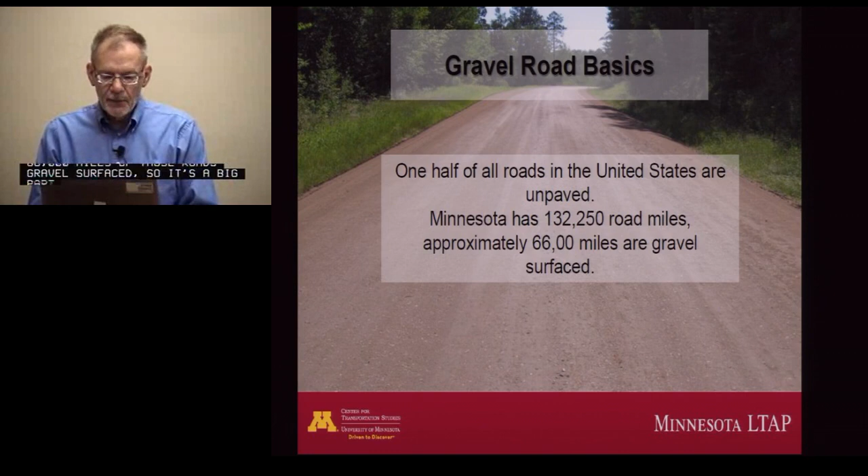What I'm going to talk about is a little brief introduction on gravel roads, and then get into developing a road maintenance plan. When we talk about gravel roads, about half of all the roads in the U.S. are unpaved. And a lot of those unpaved roads are a gravel surface. Minnesota has about 132,000 miles of roadway in the state, and that would make approximately 66,000 miles of those roads gravel surface. So it's a big part of the system in the state of Minnesota. When we talk about the importance of gravel roads, there's four bullet points of things that come to my mind.

As all of you are probably aware, the majority of our trips and loads in our state begin and end on a local road, and a lot of those are on a local gravel road. They're important accesses for emergency services to the citizens and businesses, and they provide delivery of day-to-day services and products to those residents and businesses.

And the fourth bullet, we talk about gravel roads, and something many of us that have been involved in gravel roads realize is that they were never constructed to carry the traffic that they carry today and the loads that they carry today. And that's an important thing to always remember about a local gravel road, that many of them were never designed to carry the modern day traffic.

And it causes, I think, all of us that are presenting today to think about all of you that either operate motor graders, are in charge of the maintenance, or elected officials responsible for gravel roads, that our hats are off to you for the job that you do. Just a photo of a gravel surface road that requires some work in the form of some drainage work.

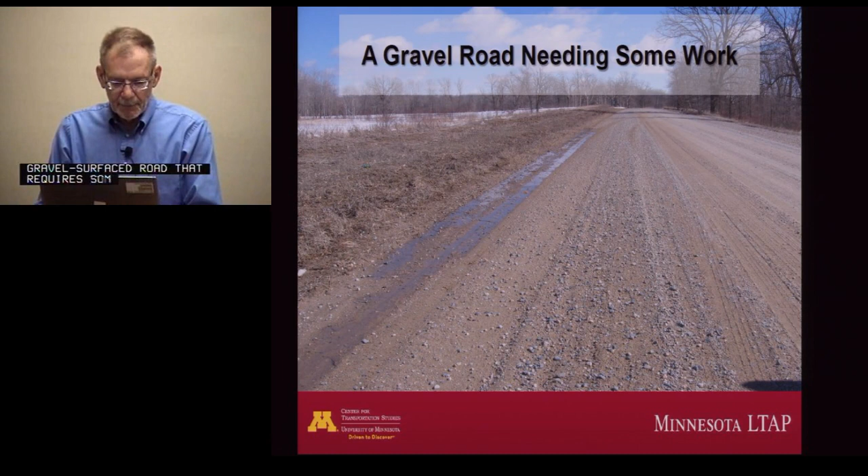When we talk about the factors of a quality gravel road, there are four points that I'd like to briefly go over. The first one being a trained motor grader operator with good equipment. And by trained, it's someone that has had the opportunity to work under someone that is a good operator, or that has gone to some motor grader training, so they have a good understanding of what the piece of equipment is capable of doing, how to operate it safely.

The other key component is quality gravel. You can have the best operators, best equipment, and the best road cross-section, and if you're not buying quality gravel and placing it correctly, you aren't going to have a quality road for the public to use.

Proper roadway cross-section, and underneath that a bullet that you'll hear mentioned throughout the next hour during this webinar is drainage, drainage, drainage, and those three terms are one of the key factors in maintaining a good gravel road. The portion that I'm going to talk about this afternoon deals with a maintenance or improvement plan and funding associated with that.

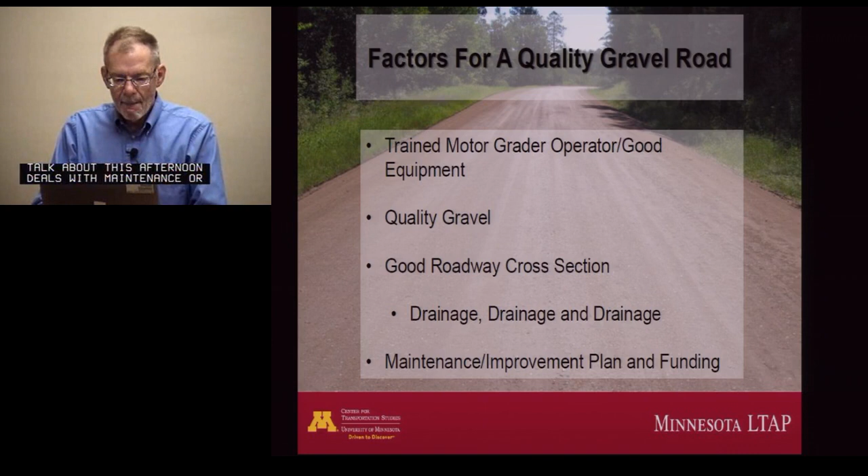Today, when we're looking at a good gravel road, which the photo on your screen shows you, with good crown, good surfacing, good drainage off the road and away from the road, in order to accomplish that quality system, it's necessary that you all think about developing a gravel road or road maintenance program. And I'm just going to go through this briefly this afternoon as steps along the way to develop that plan.

I think many of you have probably been in a situation where you're, for example, at a town board meeting where the public is not happy with the service they're receiving from their road system. It may be not enough gravel, it may be poor drainage, whatever the situation is. And you're in a situation where your level of service is here because your funding is here, and that's really all that you can accomplish with the resources that you have available.

If you want to move that level of service up to provide a more satisfied public, it will more than likely take some more funding. And in developing a maintenance program or plan, there are some basic steps to consider. One is to develop some basic standards, road dimensions. What do you think your standard road top width ought to be? What's your level of service, frequency of blading, re-gravel schedule, etc.

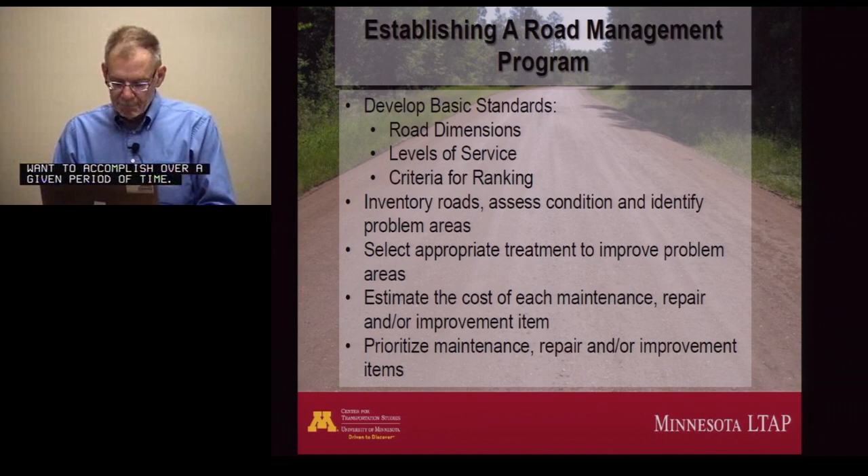And when we talk about improvement plans, we would recommend looking at a 3 to 5 year type program. When you're preparing your plan, one important thing to look at, I think, is what work you would accomplish in that plan given your current level of funding, and if your funding moved up, for example, 20%, what items on your plan list could you accomplish with that increase in funding?

And that, to me, is key when you're talking to your citizens. If they're not satisfied with the level of service that you're at today, you can show them a plan that, with an increase in funding, whatever may be reasonable for your entity, you can move your level of service from here to here, and the associated funding goes to here. I've seen a number of townships do this in my county and have been successful with it.

And it gives you, I think, a position, whether you're a maintenance supervisor or maybe the maintenance worker for a township, supervisor for a county, whatever entity you work for that's dealing with gravel roads. It always gives you the position of: if we want to leave our level of service here, and the citizens don't want to provide us any additional funding, this is as good as it's going to get. This is where we're at. So from that perspective, it gives you a plan to work from and a plan to explain to your constituents why we can do this or why we can't do that.

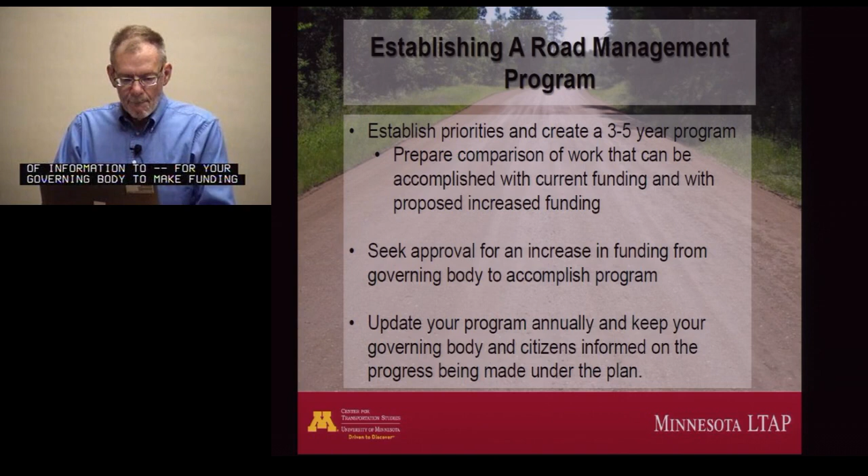First off, in educating the public of what it takes to maintain a gravel road system, and secondly, it provides a basis of information for your governing body to make funding decisions. And I'm going to close my portion of this with a gravel road rule, and John and Corey are very familiar with this rule: more good gravel is no cure for a poor road subgrade or poor drainage.

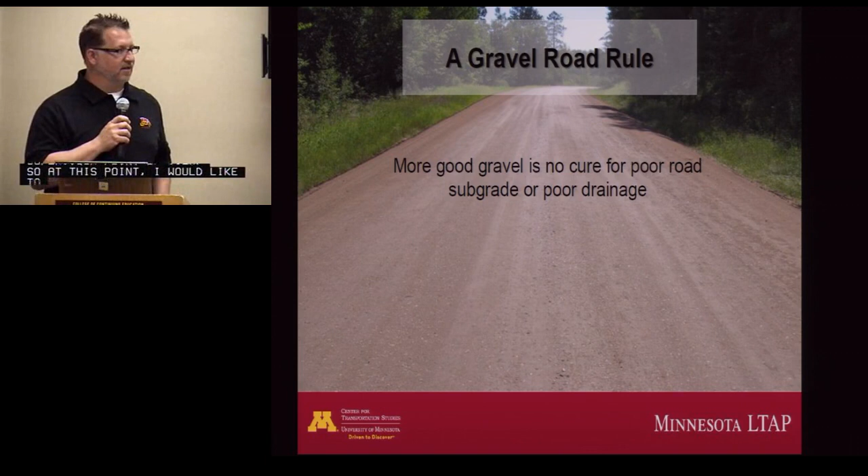Okay. Thanks, Jim. Good afternoon, everyone. My part of the presentation is dealing with drainage more than anything, probably from a supervisor's perspective a little bit, but just the importance of overall drainage in the road systems.

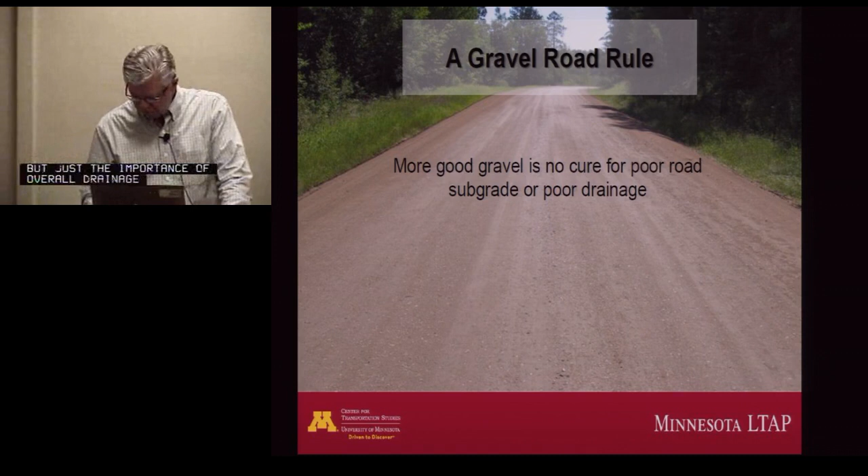You'll hear this, and I think Rick mentioned it a little bit. The three most important factors in maintaining a good gravel road are drainage, drainage, and drainage. The first part of the drainage equation is your crown, your road surface: maintain that at a 4% minimum and get that water off your driving surface. The next part is maintaining some type of ditch system.

Some of these slides will show not much of a ditch, mainly just a V-type ditch, but it is adequate to take that water off your road surface and move it along your road. And then the last part is get the water away from your road, through culverts, away from the road, in different ditch systems and so forth.

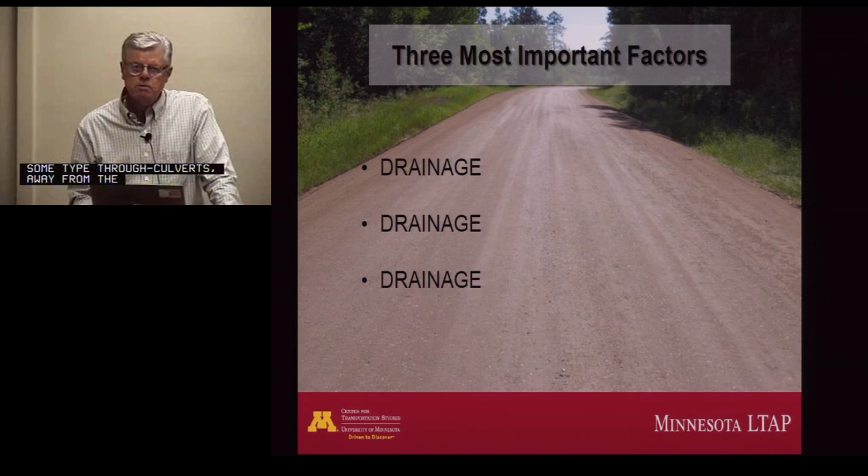Some of the issues we encounter driving around as supervisor: we see high shoulders starting. The best way to eliminate high shoulders is not to let them get started at all. You can see in the slides that there's a high shoulder starting here. It's good material, but eventually that shoulder will keep getting wider and building up, trapping the moisture and water on the road. It will not allow it to get off into the ditch system.

There's several ways of taking care of these issues once they get more complex and higher and wider. And through the years' experience, I've used a lot of different equipment. I think a shoulder disc works very well on them, where you disc it in a little ways, let it dry for a day or a few days, then come in and mix it into your surface.

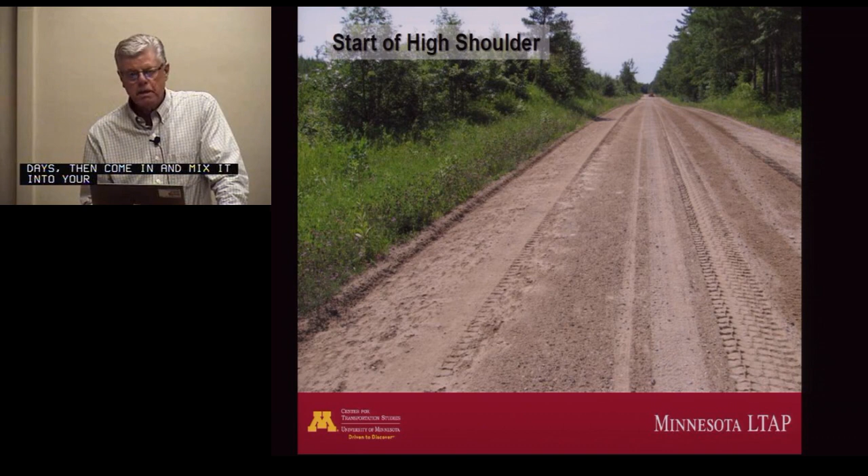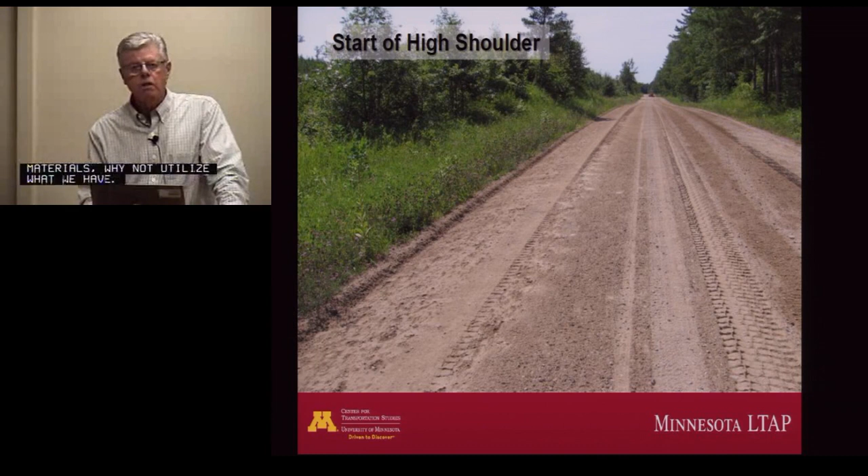Always that material out there has fair binder in it and a lot of good material. So utilize that, especially with the cost today of all our materials. Why not utilize what we have? And then if you have to re-gravel a little over the top, it makes a pretty good graveling surface.

As we mentioned, road drainage, a very important factor. This slide kind of shows the start of a poor crown, wide, really wide road that's really gotten flat and out of shape. Doesn't allow the water to get off into the ditch system.

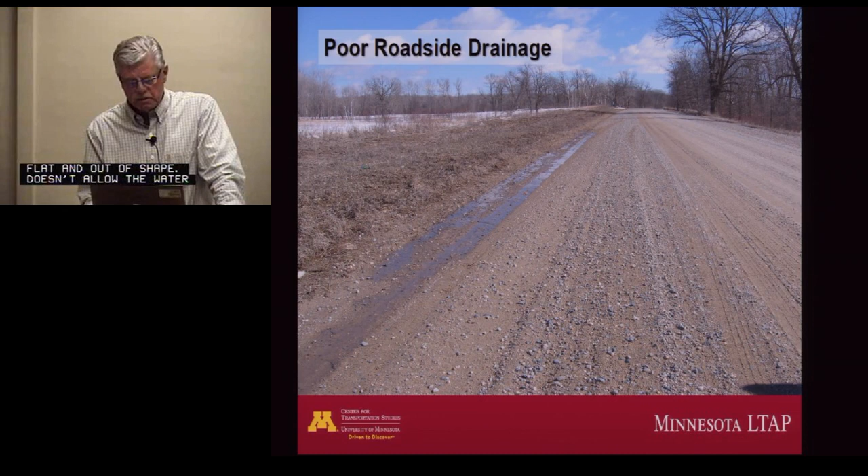Shoulder issues with ditch problem. This is kind of a complex problem. You got high shoulder, and then there isn't any type of ditch, once that water runs off the road, to get it away from the road and down into a ditch system.

Once this gets this far along, it's more than just a little reshaping issue. We probably got to do a lot of re-gravel, reshaping, get that road back into the typical cross-section that we want it to be at, clean the ditches, and get our ditch system and drainage, complete drainage system, back in working order.

Just looking at a good shaped road. It takes some time to get your road that's out of shape back into this type of shape again. In this slide, it shows a road that has the outer 4 feet at a steeper slope than a normal crown. That gives you additional shoulder width. And at one time, this road was probably bladed with a 16-foot motor grader. It took us 4 passes to complete that grading on this.

Since we reshaped it, got it back in a good typical section, 4% crown, now we're able to blade that just down and back. I think we all have to look at ways we can cut our costs out there, and with a little additional work at some time, we're able to do that. Just our routine maintenance costs on this road were almost cut in half.

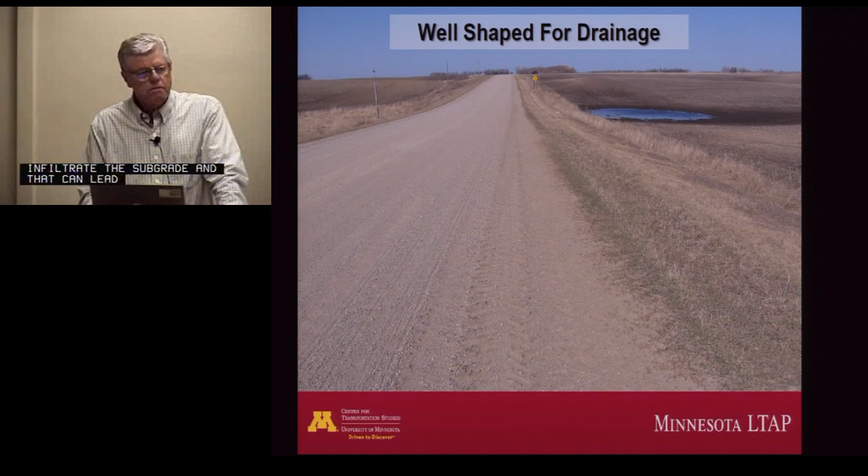Again, on ditching, here in the wooded area, some of our roads back in Becker County, which I was superintendent of for quite a few years, a lot of them are up in the forest area. We had to establish some type of ditch system, and good V ditches work very well. Once you get that established, and we did most of this work with just motor grader and a shoulder disc, you can accomplish a lot of good work with just two pieces of equipment.

Once we got it shaped, got our V ditches back in so they were operational, then we came back and re-gravelled. Prior to doing this, the road surface did need some re-gravel done to it, so we weren't just going out and spending extra money, but it was a needed maintenance operation that had to happen.

Again, on the road drainage, I can't stress enough, proper crown at 4% or probably a little bit more. Once you get under that, if you're down around that 2%, that's typically what a bituminous road crown is. You don't have enough drainage there to take your water off the road adequately.

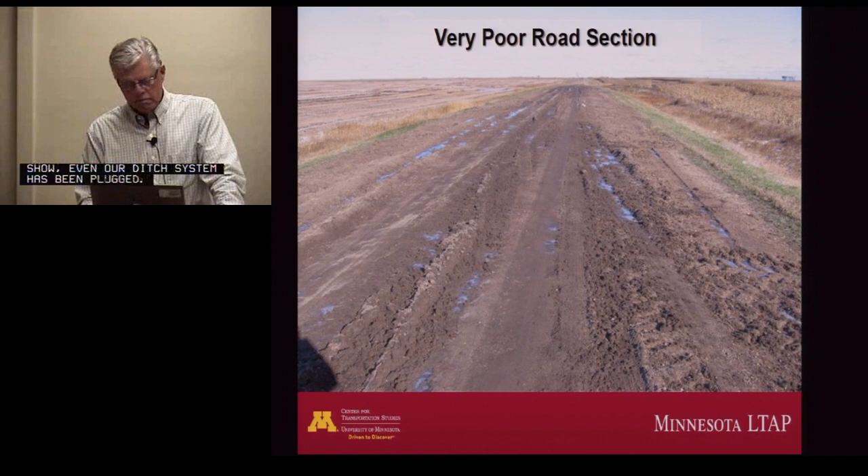Again, no crown, lack of good surface gravel, and also you can see the stuff that's been pushed over and into the ditch system. This will not allow proper drainage in our ditches.

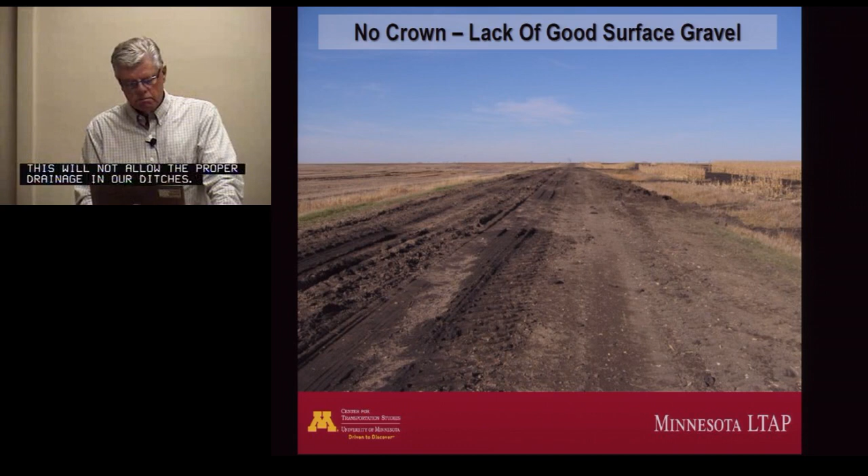Also with the drainage, we have to maintain our culvert system. What I like to do is in the late summer, fall, have your grader operators make a list. Keep track of where there needs to be some work done before it freezes up in the fall. This type of situation happened where a culvert was actually filled with material. It froze, and then you start getting calls from the farmer in the spring of the year. He's waiting to get in the field, and we're flooding his fields.

Big issue. And it costs a lot less to go out and maintain these areas late in the fall before freeze up. And I always relied very heavily on our motor grader operators to feed me that information. They're the eyes and ears out there every day going up and down these roads. As supervisors, we don't have time to cover all the miles of road once or twice a week.

So, kind of concluding here, again, drainage is one of the key factors in maintaining your gravel road system. Keeping that water off your road surface with adequate, like 4% crown, keeping those ditches and culverts clean. And once you get that water flowing in your ditches, try to get it away from your road surface. If we can maintain the integrity of our road surface, it will sure help the structure of that road, especially with the increased heavy traffic we're dealing with today.

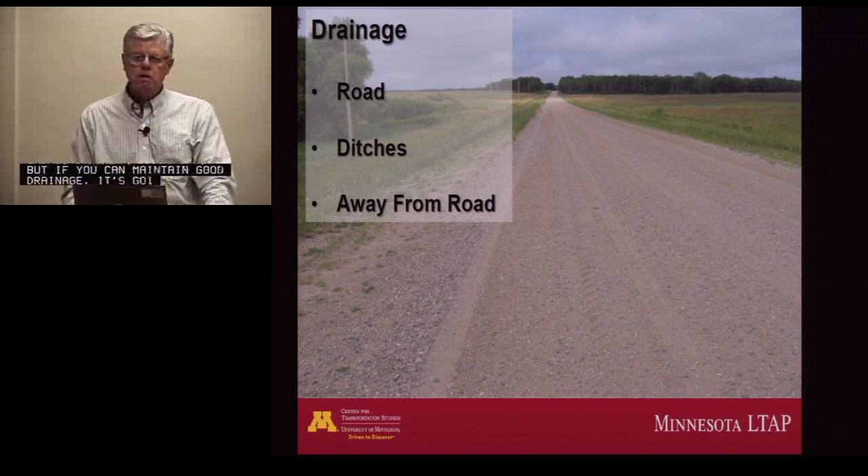Like Rick had mentioned, most of our gravel roads were not designed for the weight that they're receiving today. With the larger farm equipment, more manufacturing being moved out into rural areas, and just our day-to-day normal traveling traffic out there. Bigger trucks, more weight, creating more issues for us. But if you can maintain good drainage, it's going to help you in the long run to maintain your gravel roads.

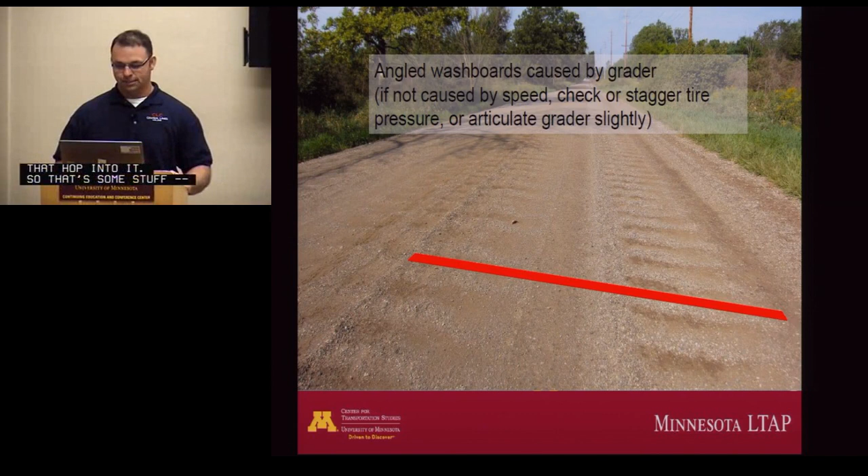And regular washboarding could be caused by lack of moisture, hard acceleration by traffic. I did some training next to a farm, and they had large equipment, and you could actually see where the trucks were downshifting in their pattern for each sign because the washboards would start and stop. And just aggressive braking or having poor quality gravel can cause that washboarding.

We had a little talk earlier about recycled asphalt. I see that a lot with asphalt. People will get a little bit where they're milling, put it on an intersection. It washboards up right away because there isn't enough binder and it doesn't have the right mix.

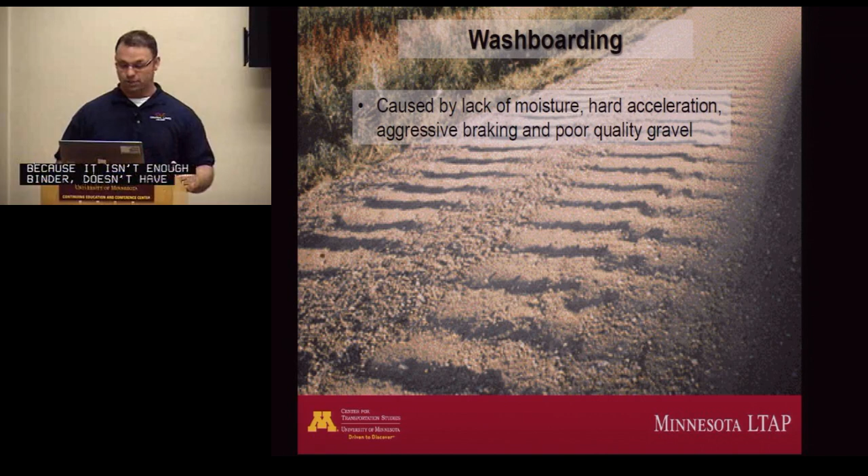So it looks hard and crusty, but then it falls apart pretty quick. You know, to prevent the washboarding, what I like to see is people scarify or undercut the washboards. There's something, I promise I didn't make up this word, but it's called differential compaction. If anybody's been involved with asphalt, you know, if you want an inch of asphalt, you have to put 1.25 inches down. Same thing with gravel.

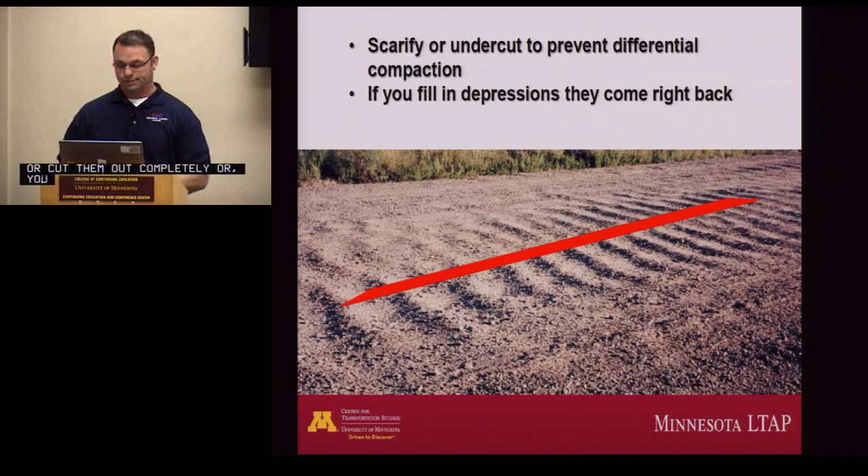If we just take this gravel and do a maintenance pass and just cover up these washboards, if they're a 2-inch divot, the next day you'll have a 1/2 inch divot there, comes right back. So you'll want to scarify them or cut them out completely, or, you know, have somebody packing behind you. So that's one thing there.

The correct slope, you know, to check that on a road. I know we've been talking in percents. I like to talk in percents, but the average guy out there doesn't understand what we're talking about when we say 4%. We're just talking about the drop in the road. 4% in 10 feet is 0.4 of a foot or 4.8 inches. 4% in 12 feet, that's 48 hundredths or just under 6 inches of drop. And really 4% is a 1/2 inch per foot. So that's something to think about.

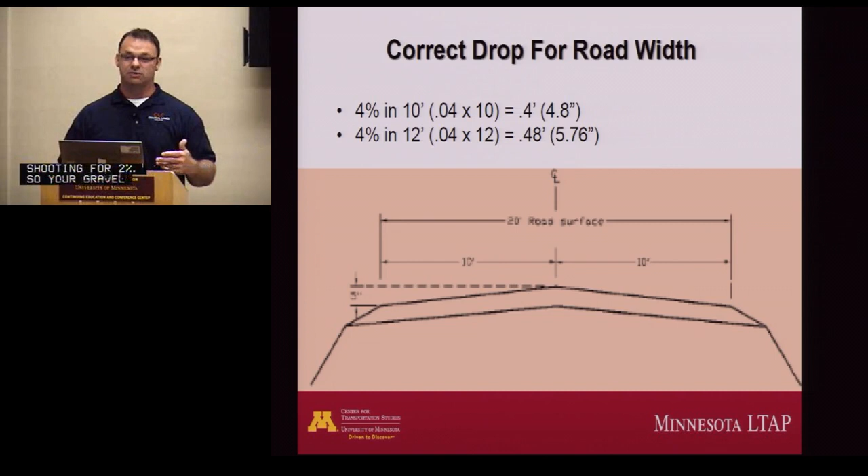There's different ways to check that. A lot of counties will have a survey crew. They could go out and do a couple of spot checks. A little later on in the presentation, I'll have a picture of a slope board you can use. I've seen guys take a small $20 laser pointer, put it up on the crown of the road, and take a shot of it on the side. Lots of ways you can check it, but that's what you're shooting for. And like John mentioned earlier, paved roads are typically shooting for 2%, so your gravel road should be twice as steep as most of your paved roads, because they are gravel.

A slope meter, this brand right here is actually made in Minnesota. If you are using these, make sure you have the percents. There's another slope meter that looks almost identical. It has more of a cup to it, and that's more for slope ratios. Instead of going up to 12, it'll go in reverse, like 2, 3, 4, 5, 6. And that's for doing like a 4-to-1 slope ratio in a ditch. But this one here, each little divot over is a percent, and they're really easy to install on a motor grader. So all your motor graders should have a slope meter in them so they can see what they just did, and it measures what you're doing.

And as a supervisor, you can install those right in the dash of your pickup or somewhere where you can see it. And to check it, all you do is set it up, mark your tires. If it says 2% one way, do a 180, park in that same spot, and it should say 2% the other way. If it says something different, you just adjust it so it stays the same. And you can actually drive down the road after your operators are done working, see what they're doing, and inspect them that way.

I've seen guys get smart levels and put them on their dashes. That's just a digital level that you can put in percents, but you actually have to stop with those because it's moving too quick. With these, you can be moving while you're doing it. You just watch on the curves. If you're going too fast, it'll swing that bubble around and give you a different reading. But easy to use, 100, 150 bucks, good investment.

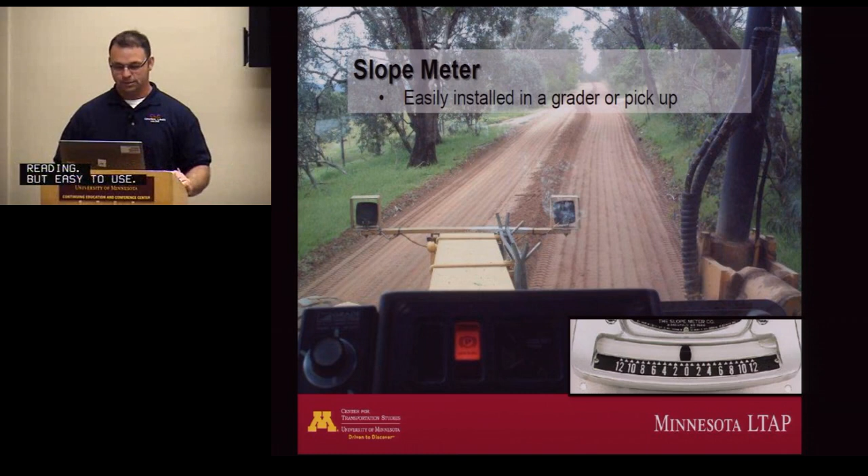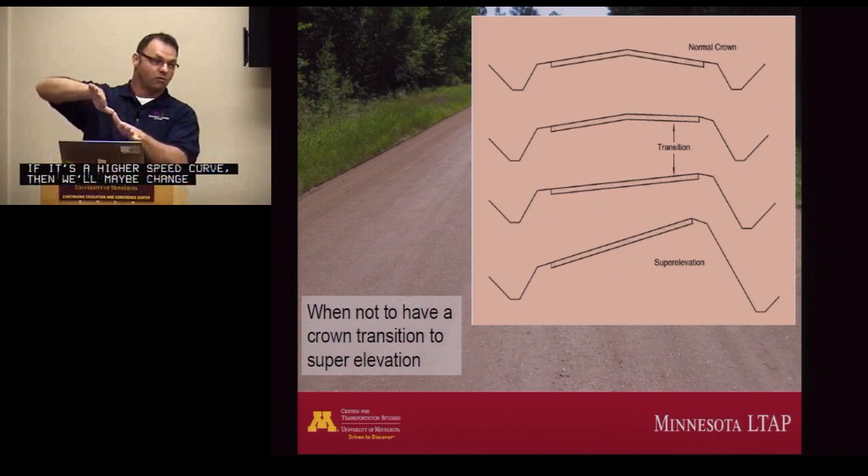One spot not to have a crown is a transition to a super elevation. So we've been talking about a typical gravel road with a 4% crown. Now if you've watched NASCAR races, where they have the banked curves, as we go into these curves, it's called a super elevation. So what I do is I leave the bottom side the same, and depending on the speed of that curve, maybe 100 feet back, I'll start jacking up the high side a little at a time. So when we get into the full super, we're like this. If it's a higher speed curve, then we'll maybe change it to a 5, 6, more of a percent, just depending. And then as you come out of it, you just slowly crank down the high side. That's important in the wintertime in Minnesota.

Imagine that NASCAR race where if it was banked the other way, the cars would go sliding off. That's what happens in Minnesota here in the wintertime. The cars just go flying off. One way to inspect that: if they are built properly, the traffic whip from going around those super elevations will make them too steep, if they're built right.

So the gravel will actually naturally go up, and the operators actually have to pull it down. When they're built incorrectly, the operators actually got to pull it up the other way. So that's something to look for. But that's when not to have a crown.

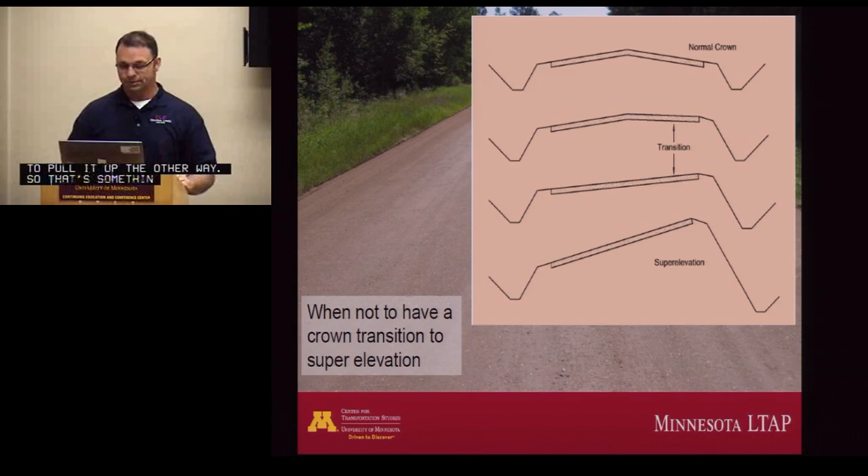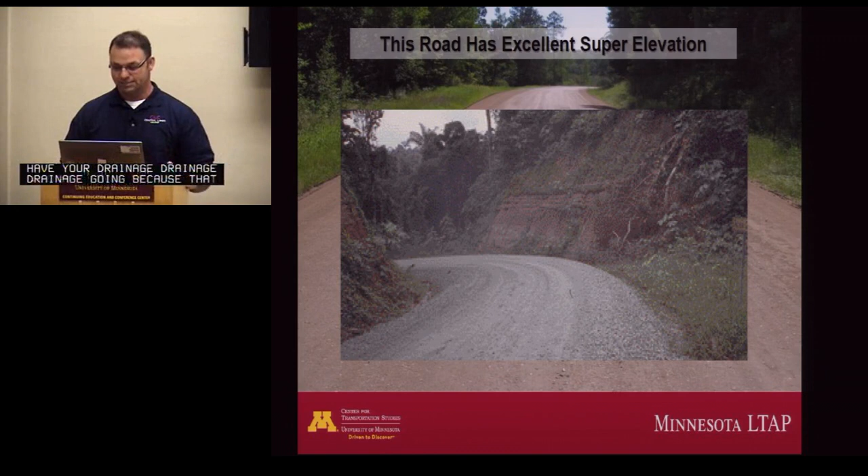Another place to stop crowns is coming up to railroads or bridge abutments. Obviously, that railroad is going to be in a straight line, so maybe 100 feet back, you start warping out of that crown so that when you get there, you're flat. And just make sure that that flange is clean on that railroad, because you don't want to cause a train derailment by pulling gravel up on there. That's another instance of where not to have a crown.

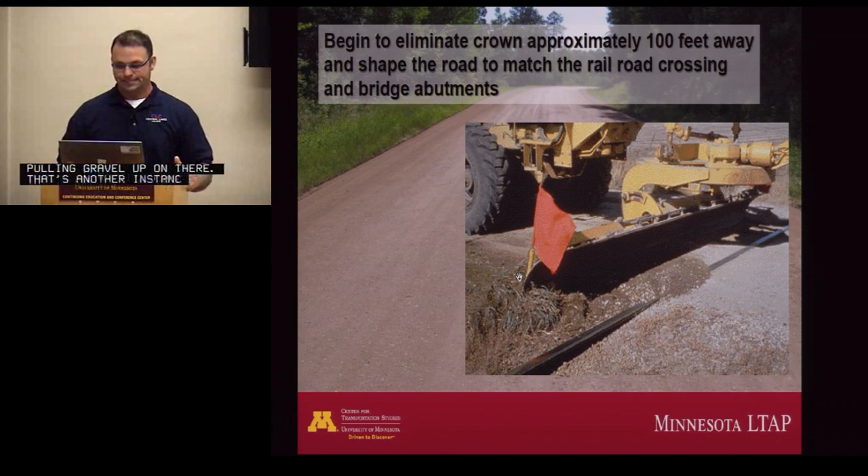Talk a little bit about intersections. The primary road should retain its crown. So if you've got a thoroughfare here with no stop signs, they should maintain their crown. And the controlled sides should have stop, and they should match the shoulder of that intersection, so that when you're driving through these intersections, if you're on the thoroughfare, you shouldn't feel this in your car as you go through those intersections. The stop signs, they're stopping.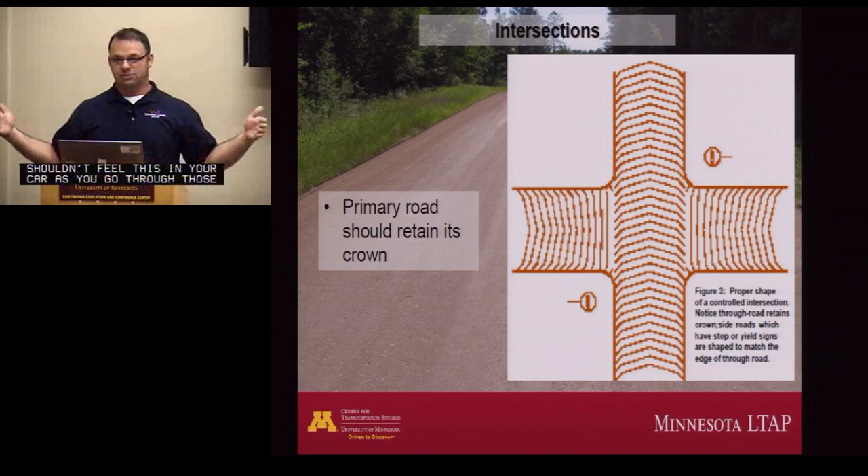And that's another safety hazard. If you're driving down the road and you're doing this all the time, when it's icy up here in Minnesota, you could have an accident. So that's something to check for.

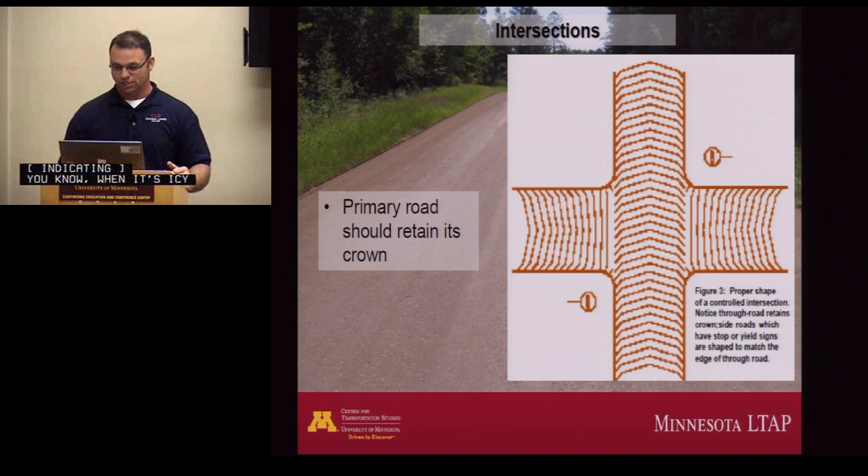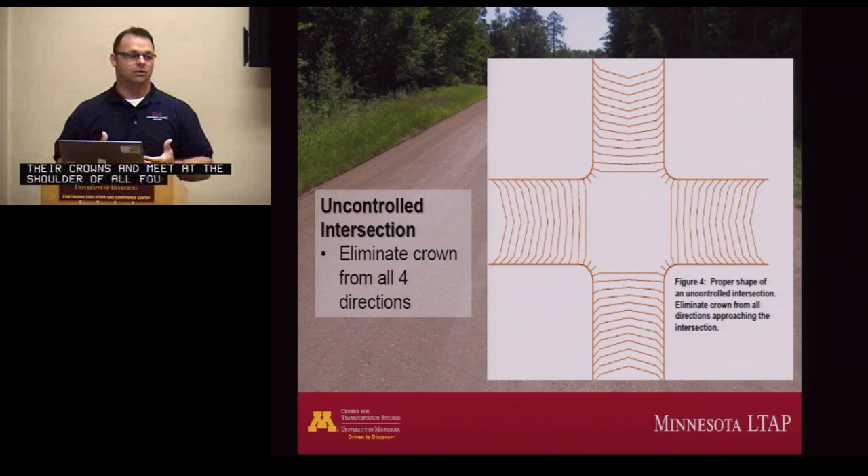Uncontrolled intersections, that's where nobody has a stop sign. With uncontrolled intersections, the ones where you yield to your right because you have to watch for traffic, the actual intersection should be flat. Everybody should warp out of their crowns and meet at the shoulder of all four sides. The only thing is you got to make sure that intersection isn't low, because it'll be a big bird bath. That intersection should be elevated so it does have some kind of drainage.

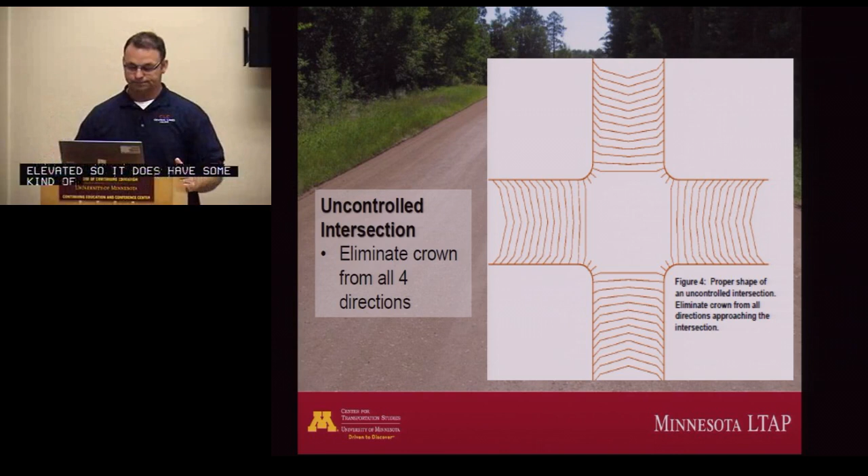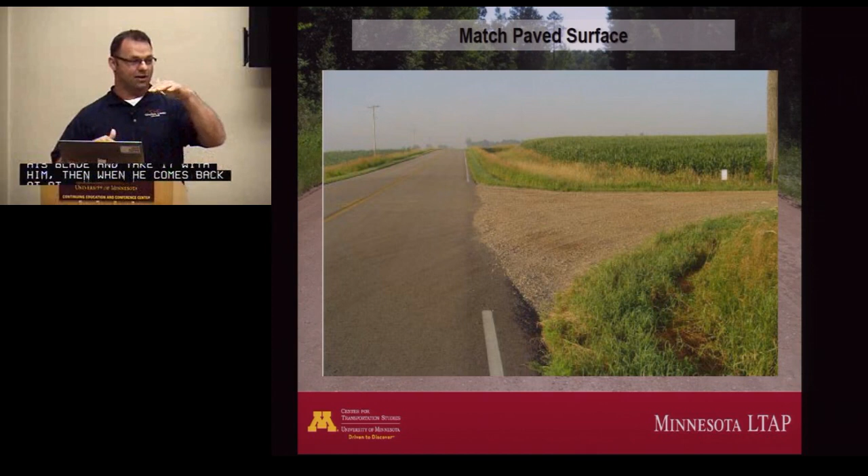And with these types of intersections, it's easy to tell if your operator is doing it wrong. He'll always start here and he'll go this way, and so he'll fill up his blade and take it with him. And then when he comes back at the end, he'll dump what's on his blade here, so the one side where he stops will be higher than where he starts. So what I do is when I come back, I just swoop across and fill in where I started from. Maybe I have to do a little back blading, that sort of thing. But just another instance where you should not have a crown.

Driveways, entrances. As you're going down this public road, this is the public road. This is your farmer's driveway or entrance. A lot of times you'll see these getting pulled way out because maybe the farmer is dragging his road or getting gravel from the public road and pulling it up his driveway or vice versa. But as you're driving through this public road, you should not feel those driveways as you're coming through. And it just takes a little time. Operators out there or supervisors, don't gouge them all out at once, just a little at a time and start fixing those things.

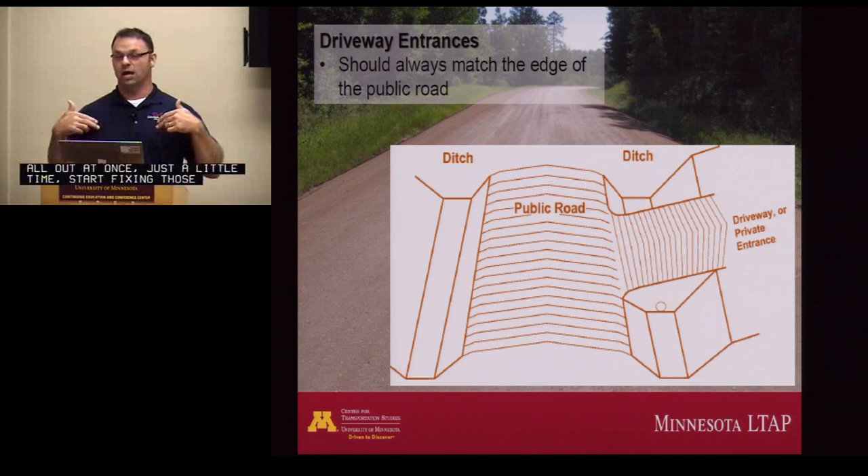And again, for snow removal, when you're set up and you got your blade set up for plowing snow, if these slopes are constantly changing and you have these driveways, you're going to see a lot of gravel in the ditches around these areas where they have to change to match the road. They should be staying the same.

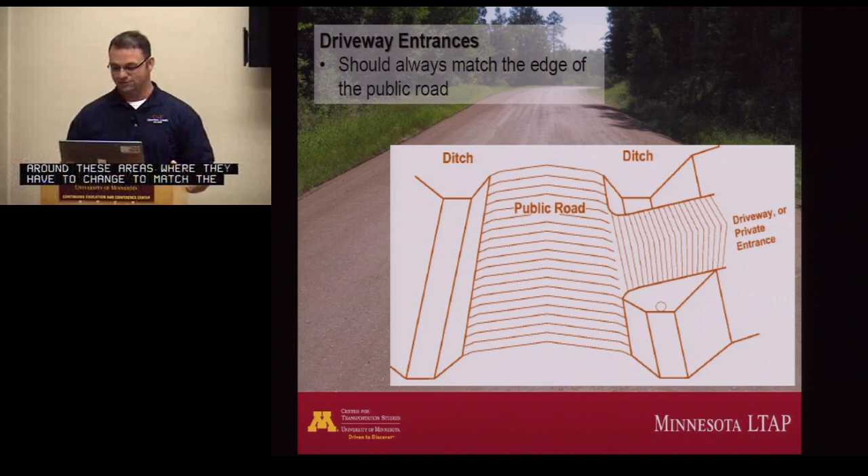So very inexpensive thing to have, but a good way to check your grade. And you get visual proof. You can show your operator, hey, this is what you're doing wrong. And what's nice about this slope meter, since we're talking in percents, if it's 1% off, that would be like 1.25 inches in 10 feet. So that's something that you can raise that up and say, this is what this should be.

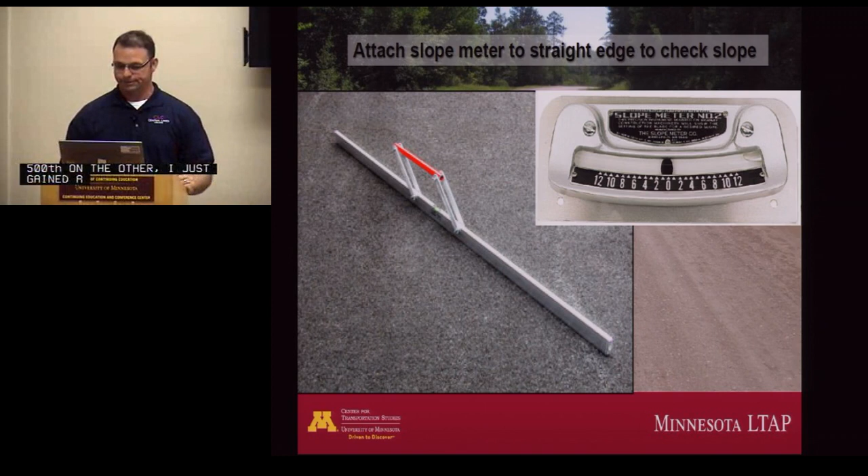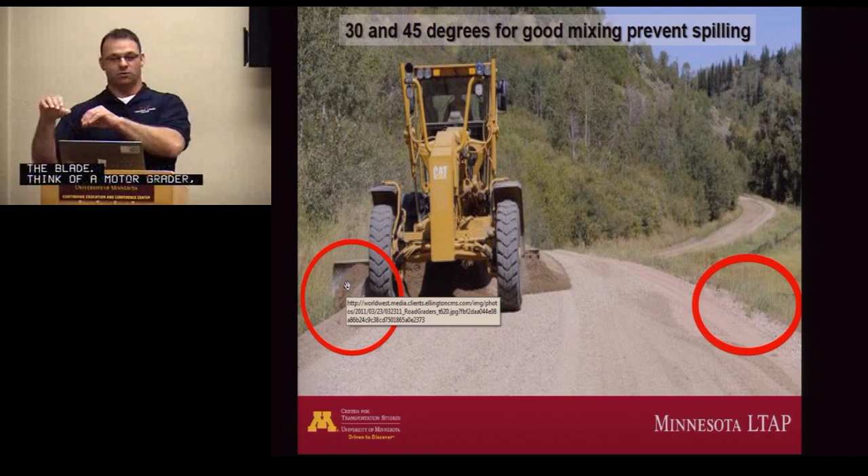Blade position. This picture here is just if you look at the toe of the blade. If you don't have 30 to 45 degrees of blade angle, what happens is as you're pushing the gravel along, it's shoving instead of mixing and reincorporating with the fines and getting pulled across the blade. If you just think of a motor grader, it's designed to carry material from the right to the left. It's not really designed to carry it forward. So if you've got the right blade angle, you're going to mix that gravel back up and get it re-blended. Every time you touch gravel, it causes segregation, so you're trying to fix that from the traffic causing the segregation.

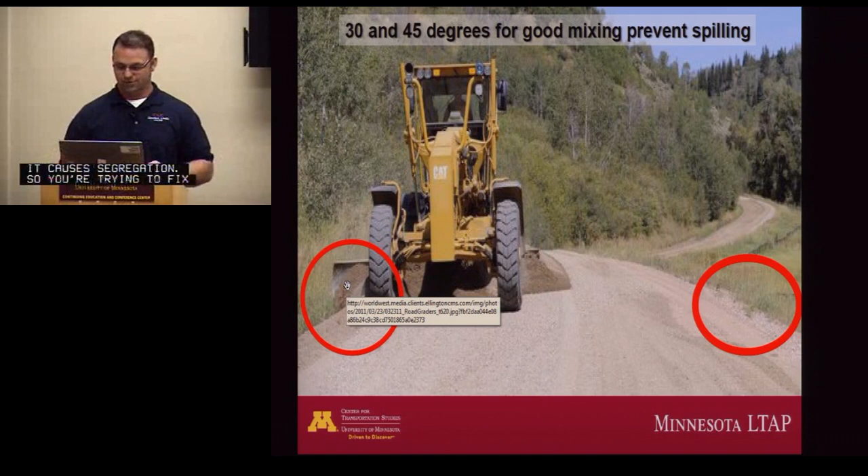Just to determine the correct moldboard, most people out there are using a 16-foot moldboard, so that you can actually have the right angle and blade that 12-foot wide path. Some places maybe they have a 10-foot top. Most of your roads have a 12-foot top. So if you only have a 14-foot moldboard, at 30 degrees, you'll have 12.1 feet. With a 16-foot moldboard, you can actually have that at about a 45-degree angle and be almost at 12 feet.

And what I do is I just notch. I get it set up. When I do my motor grader training, we'll set it up so it's right. I'll put a little notch right back here so that from the cab of the machine, the operator can look and see where that 30 or 45 degrees is. And then he's almost got like a homemade jig as he's blading. He knows he's making a 12-foot pass.

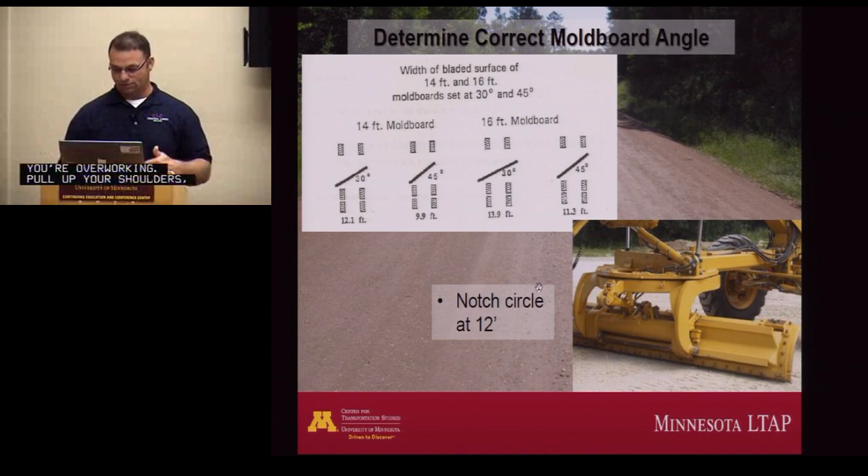Now, I think that's important because why would you be blading where cars aren't driving all the time? You know what I mean? You're overworking. So you can pull up your shoulders, tighten up your road so that you have the right widths on top and actually have less work later on. And again, just to piggyback on that, mixing action is part of routine maintenance. You're either part of the solution or part of the problem. So a lot of motor grader operators, nobody's ever told them about gradations and mixing gravel and what that binder's doing.

And the motor grader moldboards typically wear in the center pretty rapidly. So this next slide here is just a picture of a parabolic crown.

Now I think, you know, seasoned is the correct word for John and Rick.

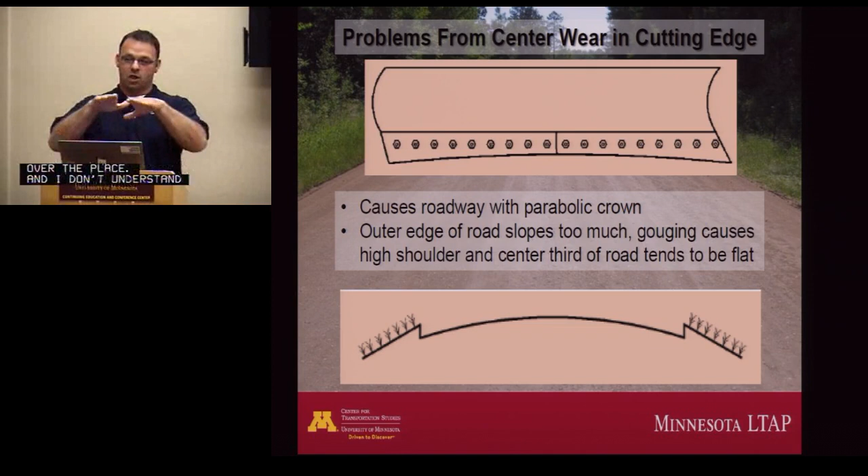Years ago they talked about parabolic curves. I live in a town where they still do parabolic curves all over the place, and I don't understand why. And that parabolic curve, instead of just straight lines, it's kind of a curve. And it's really hard to do snow removal because you can't ever really cut down.

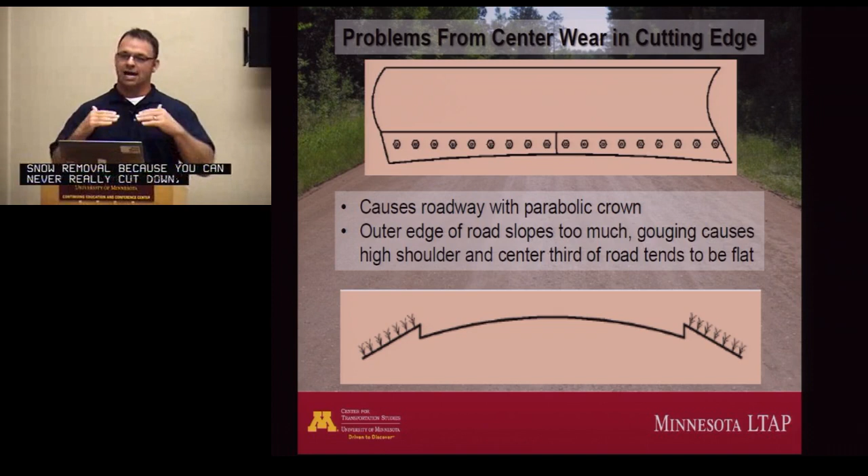But that moldboard, over time, it'll get that parabolic curve into it. So as you're blading, the middle part here will be pretty flat, and then it'll cut and cause these high shoulders on the sides. So it's just something to watch. Switch them around. Just have your operators maintain their cutting edges.

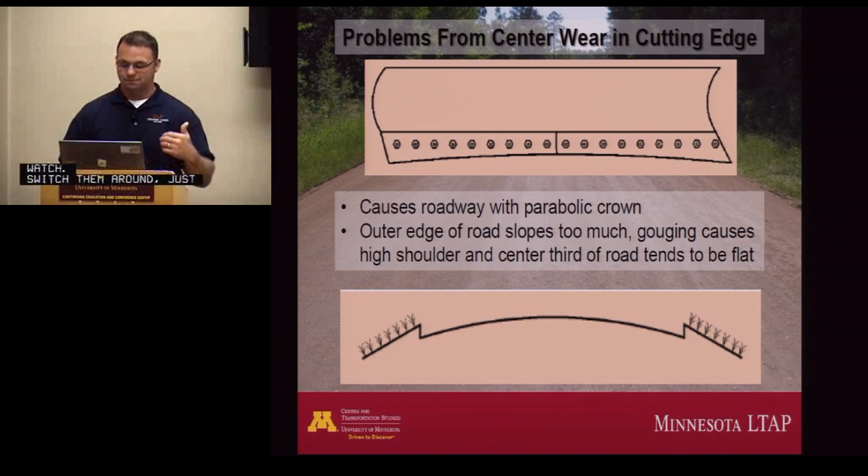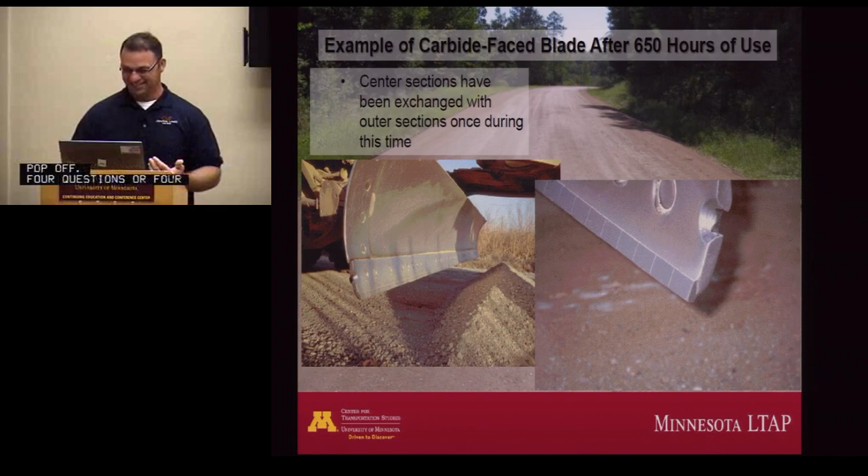This looks at some replacement bits, different examples. And again, trial and error, get some. Maybe you can have a supplier give you some at a discount to use and try out. When you do use these bits, they're designed not to cut windrows with. They're designed to run almost a straight blade because that bit, the way it's set up, it's going to mix anyway. So disregard the blade angle that I talked about earlier when you're using bits.

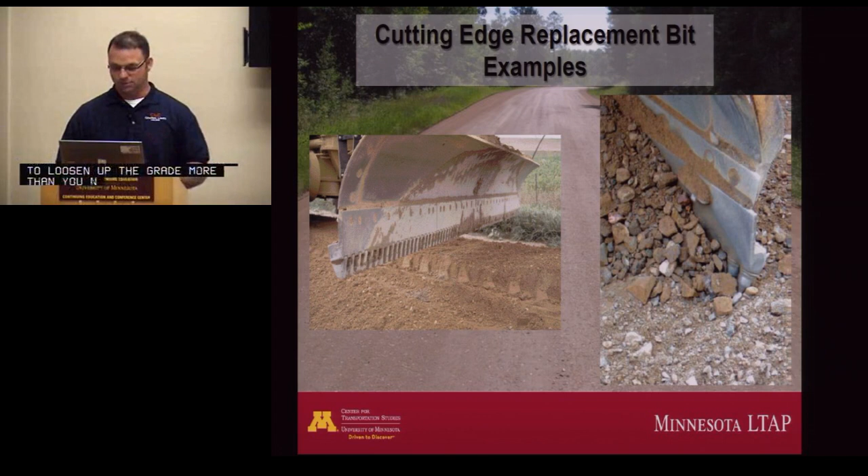But if you are putting up windrows, it'll actually cause more damage to the road because you're going to loosen up the grade more than you need to. So it's something to think about. And they are designed to go at a specific angle. This manufacturer, this style I have up here on the board, is designed to run at 20 degrees back from vertical. So just get with whoever your manufacturer is. Make sure they're using them right.

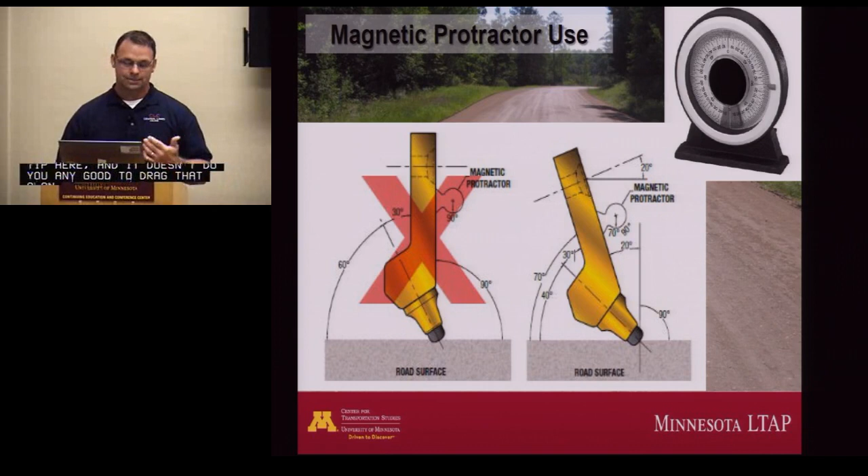And again, you've got this carbide tip here, and it doesn't do you any good to drag that along, and you hit a rock and you lose those carbide bits. Roller use, the slide I have here is a pneumatic roller. What that does for you is it kind of kneads the gravel back. You get compaction that way, and it seals it up.

When you just pack with your tires, you're not getting uniform across the grade, and you can actually cause more ruts later on when you aren't using rollers. So if you have them, use them. If you don't, they're fairly inexpensive to get.